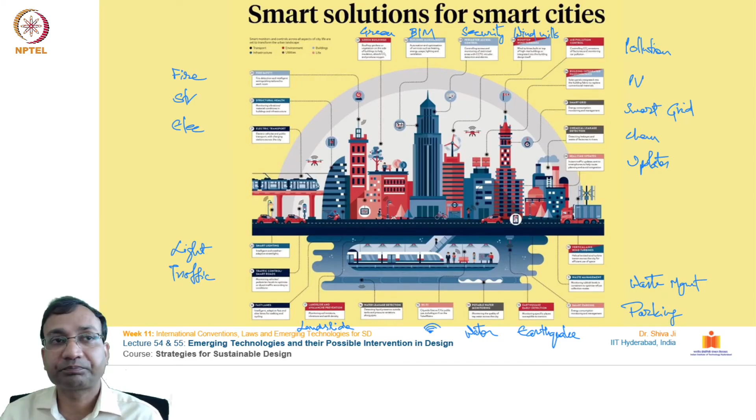Further, on infrastructure productivity, how infrastructure can be utilized more for larger output, because infrastructure once established will be standing for a very long period of time. So the capital invested, or the spaces or buildings created, can be utilized in multiple ways also. For example, if there is space allocated for running a certain activity, what happens once the activity is performed in a scheduled time? After that scheduled time, what happens in that building?

This can be thought of as automated systems that can be designed to extend the uses of building premises.

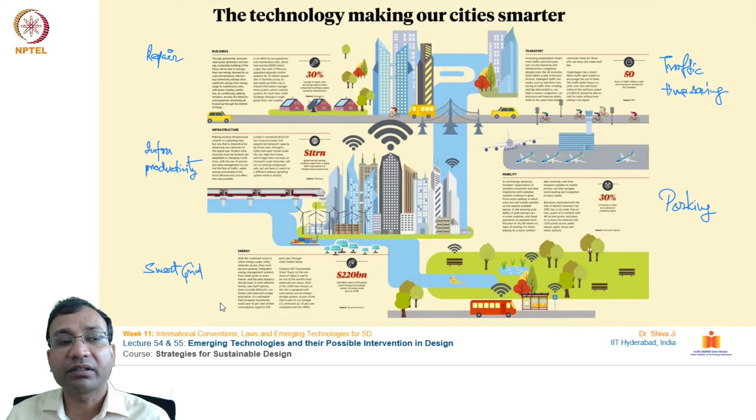Similarly, we have seen technological interventions in traffic management resulting in time saving for users and city dwellers. So how can optimized traffic management systems be designed around these buildings or business district areas, optimizing cost saving, time saving, resource saving, and fuel saving? Further, we have discussed earlier parking-based technological systems and smart grid systems, resulting in saving on resources.

So how are these new technologies coming to the aid of the overall design and construction sector? We have prefab construction systems also in place. For example, if a building is going to be constructed in a busy business district of a city, it's going to cause a lot of disturbance to the surrounding area. Plus, having construction work going on for a longer period of time will further increase the costs of that building.

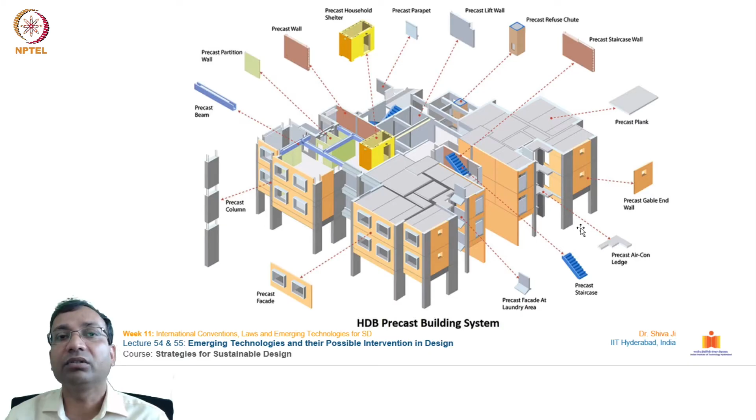So how can these prefabricated building components be utilized to create an optimum and efficient solution in a shorter span of time? This is one of the technological intervention areas, going for prefabricated building components for faster growth and faster pace of construction.

You must be aware of 3D printing - it's an additive manufacturing technology. So this 3D printing is also adding to construction in an efficient way. Plus it minimizes a huge amount of waste, because it doesn't leave any residues or extra material. It lays material only where it is necessary or where it is designed to be laid, resulting in significant savings compared to conventional reductive ways of construction.

There are 3D printers coming in a very big scale also, and they are good enough to build small scale structures, maybe 1 or 2 stories high. There are several examples from across the world - you may have seen it already in the news, how several agencies and companies are coming up with innovative ways for 3D printing buildings.

So this is going to be one of the disruptive innovations in recent times as far as the construction sector is concerned, because it will significantly reduce operations, management, costing, material, and energy consumption by the building.

This is one of the areas where you must put some attention. You can take help of this 3D printing technology and come up with solutions for how the materials required for building construction can be utilized for 3D printing in an efficient way.

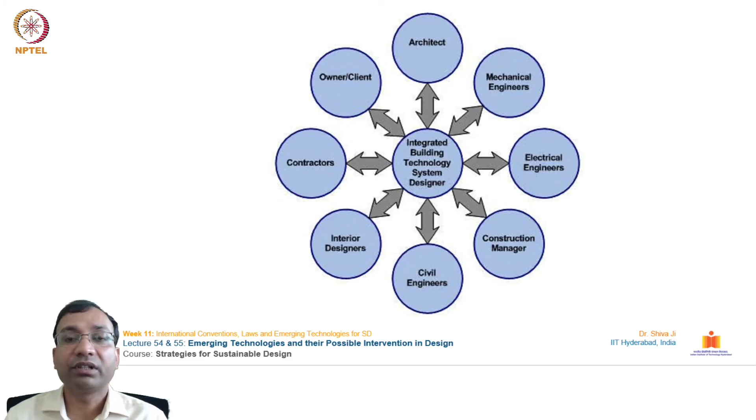Because a building actually lasts for several years, several decades, and in that period, in its operations stage, it utilizes a huge amount of resources and energy. So how this can be brought down while increasing the efficiency of it, technological interventions can come to the rescue.

If there is any fault in a certain segment, they can identify that fault, they can isolate that segment without interrupting the services to the entire building. They can go and take some corrective measures.

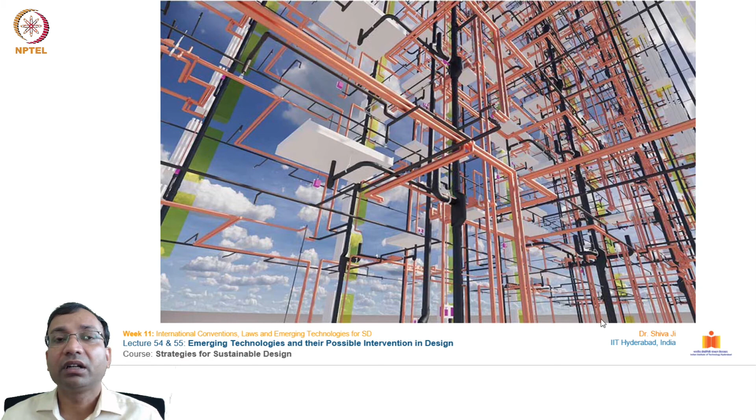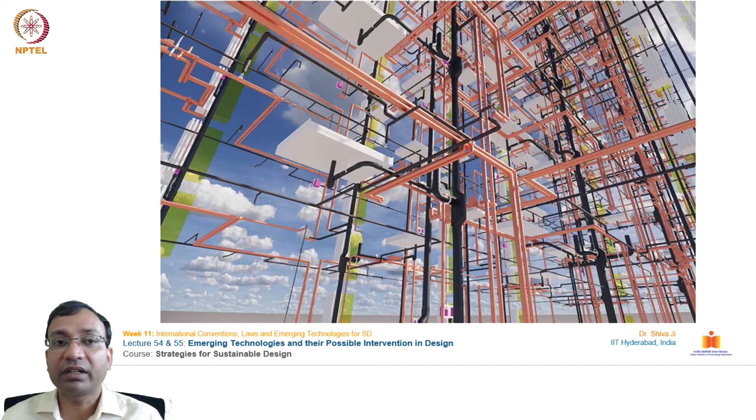So this is a network we usually do not see with our naked eyes, but our buildings are fully functional, like a sort of living organisms, who consume resources, who do some work, which also leaves out some other waste material. So this is like a living system. This is how this building works, and technological interventions can help conduct this work efficiently.

Further, we are talking about BIM over here, building information modeling. Starting from the design phase, starting from the conceptual phase, where we are envisioning what kind of services and operations and utility we desire from this premise, and then going for the detailed design, analysis, documentation, fabrication, construction, the other logistics related with the construction, operations and maintenance, renovation, regular preventive maintenance, programming, etc., and then the end of life stage. So BIM handles the operation stage completely.

So it takes care of each and every component, each and every service which is there inside that building, whether this is water supply, fresh air or conditioned air supply, whether it is a fire prevention system, or some alarm system, or maybe energy consumption system, maybe for lighting, ventilation, etc., even for operating lifts, escalators, etc. So this takes care of all of those things.

Even it can calculate the energy load which can happen on any given building at any point of time in the year. So this has an analytical component also, which takes care of energy planning so that the energy consumption can be minimized. So you see, BIM is a very utilitarian technological intervention in the building industry altogether.

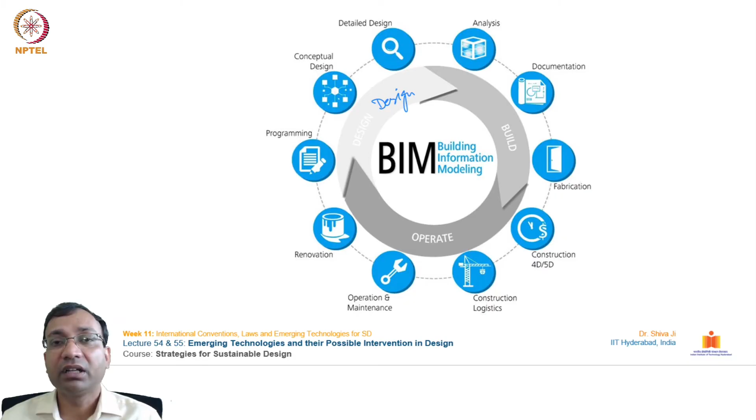Further, if we go material wise, how efficient materials can be brought into use in these buildings. So this is discussed on this particular slide, how the technology from material sciences can be utilized in the application of certain materials, for example glass over here.

So the surface orientation is a factor which can decide the application and the types of glass and the thickness of it. Then the color shift, what kind of color we want at what time of the year, at what time of the day, whether we want a larger intake of light inside, or we want to reduce the light depending upon the hour and the months.

All of these factors play an important role in deciding material specifications. In materials science, it's important to have technological input—there are technologies available today that help control the glass, so the intake of light can be controlled and changed by the occupants. The orientation of fins can also be changed depending on the time and month of the year, based on how much light we want to bring into the building.

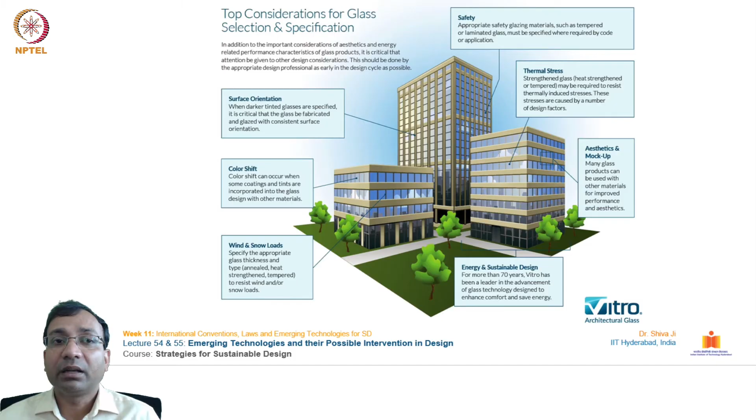There are also technological interventions in fire safety for buildings. New types of sensors and isolators are emerging that can sense fire and isolate a certain segment of the building to reduce the spread of fire to other sections. These systems are being installed in multi-story structures because they are highly vulnerable to fire damage, and extreme hazards are likely in such incidents. This technology is being implemented in most upcoming high-rise buildings, enabling fire safety over a longer period of time.

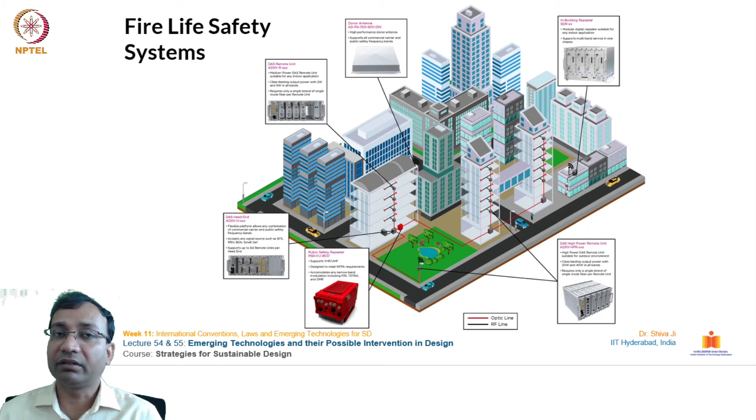Further, there are technological inputs for flexibility of use in buildings—how a certain activity can be wrapped up in a shorter span of time, and the building floor plate can be made available for other activities. This flexibility and adaptability of building spaces is one of the domains where technology has come to the rescue.

Further, cognitive buildings are able to sense a number of things, strategize and plan the use of resources, and take corrective actions to safeguard safety or security, or address any hazard. This is where buildings are turning into smart buildings. Once they develop these cognitive abilities based on real-time data collection, they may be able to take even more corrective measures to prevent hazards or take care of occupants.

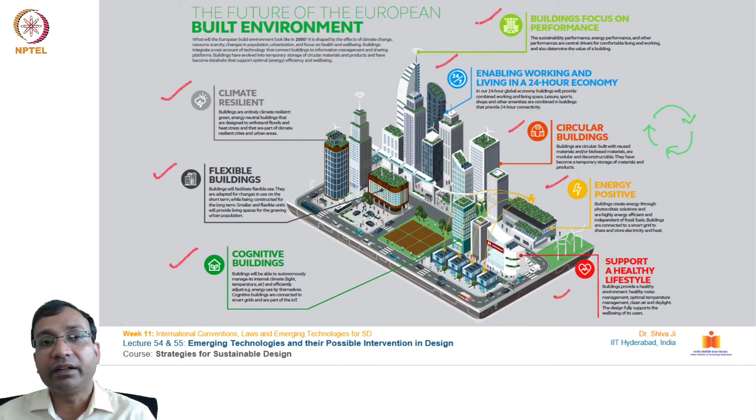Further in the networking also, each and every gadget, each and every appliance, each of our electronic devices are connected with the internet. They are receiving information, receiving data, functioning with the desired given commands. For that, this huge networking system is one of the very important and necessary things to do. Whether it is wired based connection or wireless based connection, a good networking inside the building premises is one of the most required entities.

In the recent pandemic, you may have experienced the use of electronic gadgets such as phones, computers and internet grow considerably high, because they were able to facilitate us for our education, e-commerce activities and several other things. With the help of this growth in telecom and computing, which India was already witnessing for the last few years, this has come very handy for Indians to survive through this pandemic situation.

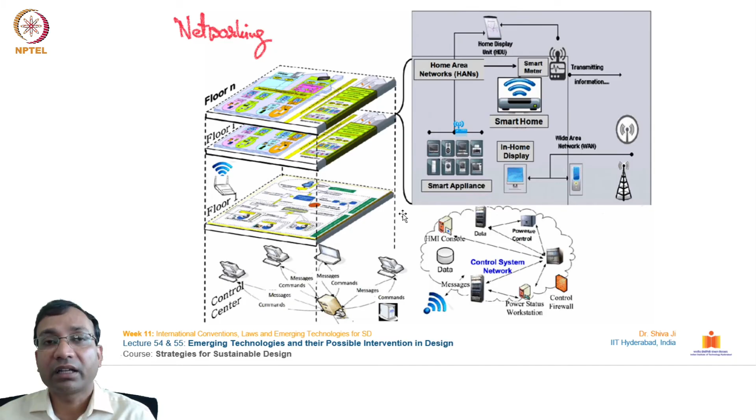You can see that 95% of aluminum in buildings is recycled at the end of its life use, according to a 2004 study by Delft University of Technology. This study is from the Netherlands, so this data may not actually be true for Indian conditions, but we can have our own analysis of such materials.

If you see, aluminum is infinitely recyclable. In fact, nearly 75% of all aluminum ever produced is still in use today. That's a huge feat as far as sustainability is concerned, because 75% of all aluminum produced till now in the entire world is still in use somewhere. That's an amazing feat if we compare it with other materials such as plastics.

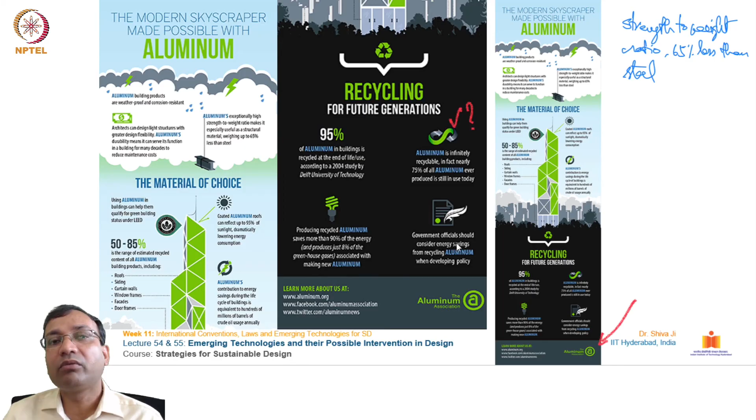Further, aluminum's contribution to energy savings during the life cycle of a building is equivalent to hundreds of millions of barrels of crude oil used annually. If we compare with other materials, it certainly has advantages. So why not use technological interventions to improve upon these materials and reduce the impact.

Okay, so how can technology such as artificial intelligence play a role in achieving the sustainable development goals. There's actually a study you can refer to, in this journal from Nature Communications, which says the positive impact of AI is up to 79%.

It is divided into three aspects of sustainability: environment, society, and economy. The SDGs you see here are color coded and numbered, showing how much positive impact is possible, and how much negative impact is also studied through this research. So it shows there is a huge scope of improvement with technological interventions such as artificial intelligence.

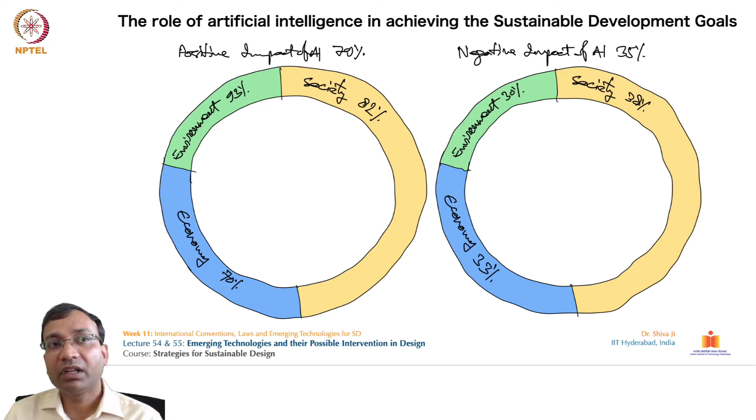Here we have this environment at the top, and there are the activities and the interrelationships we can see with these arrows. So there is certainly some relation between artificial intelligence, this technology, and the people and the other species, other life forms. Accordingly, the resource consumption, or the policy frameworks and legislations, can be planned, so that it can work for resource optimization or creating well-being in society. So this is how this technology can be fine-tuned to help the planet.

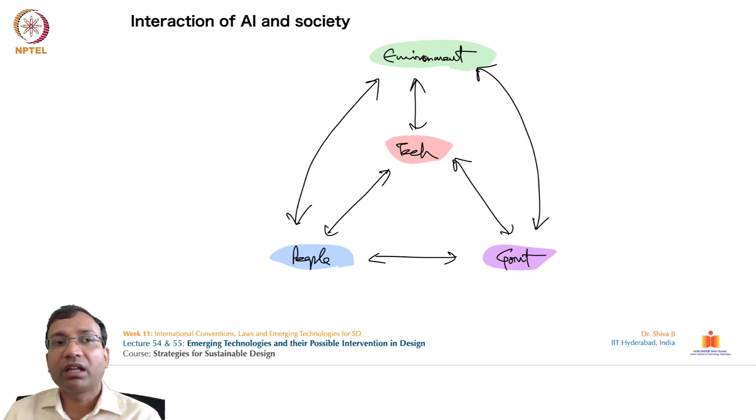Cloud computing and cloud monitoring mean that even if you are away from the building premises, you can take care of it. This BIM, building information modeling, and the sensors and other equipment installed in the building keep us connected with the performance and the real time data of whatever is going on inside the building. We can take preventive or corrective measures, as and when required, through our phones, tabs, or computers. It has become so convenient that we can operate our buildings even while being at a remote location.

So with the help of such technology, cloud computing, networking, etc., this is where we see the impacts of technology in the building industry. We can strategize why this technological interaction and this lecture was needed for our understanding of how we can devise our buildings according to the technologies, or by adopting new emerging technologies which are coming into use these days.